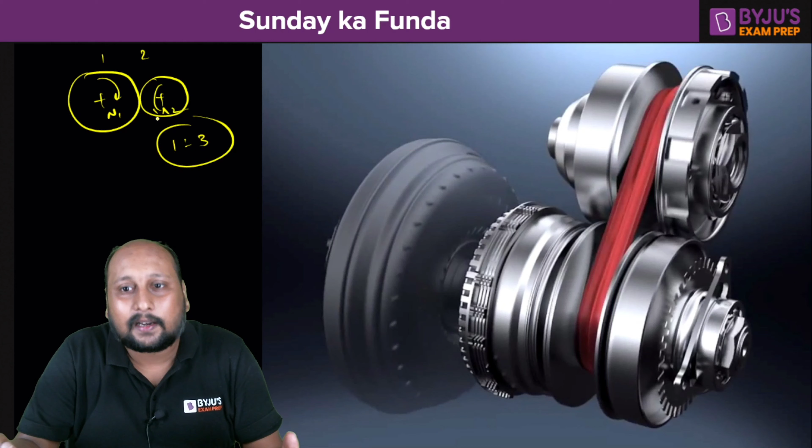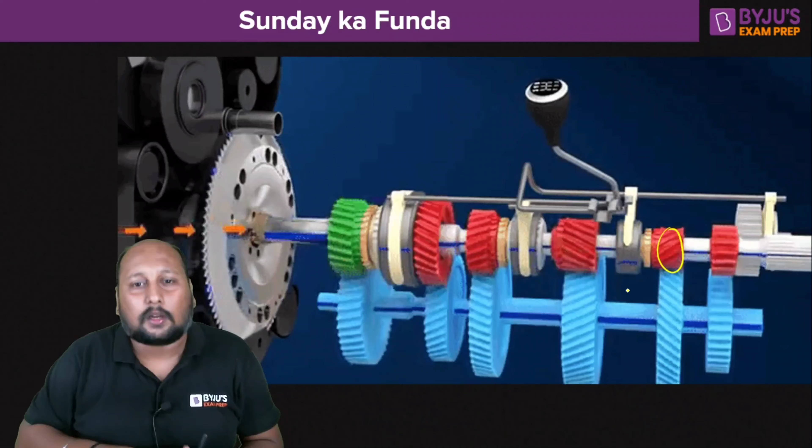So let us see the main components. This is a conventional gearbox in which, if you see clearly, we are able to change the gear and the power basically moves from left to right. According to the combination of different gears, we alter the value of RPM. For example, if a smaller gear is in mesh, that means high RPM, less torque. But if a bigger gear is meshing, it gives less RPM and higher torque.

We actually require that at high gears like 5th or 6th gear, we are cruising at a speed of 70, 90, 100, or even 120 kilometer per hour. But in first and second gear, we only try to limit it to max 10-15 kilometer per hour, that's it, we try to change the gear. If you keep it in the same RPM for too long in first and second gear, then the engine gets burned out, the temperature becomes very high.

Now if I talk about the main components of CVT, there are basically three main components: one is the input shaft, second is the steel belt, and third is the output shaft. In the simplest way, you will understand continuous variable transmission as an input shaft, a steel belt connecting the input and output, and an output shaft running at a low RPM. Now in a conventional gearbox, they were connected with the help of a gear.

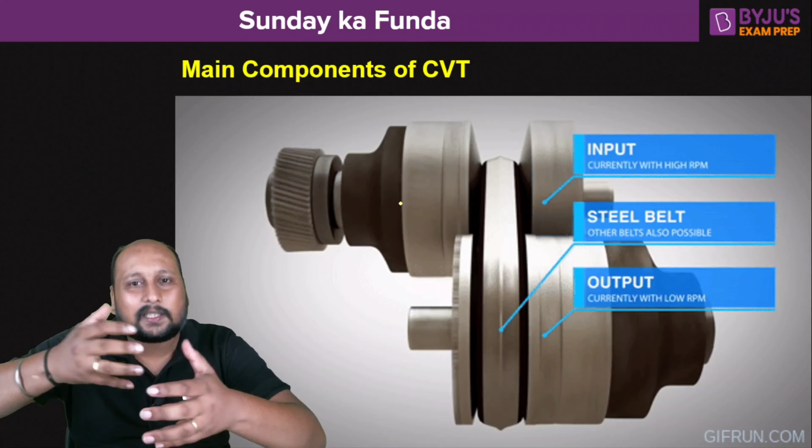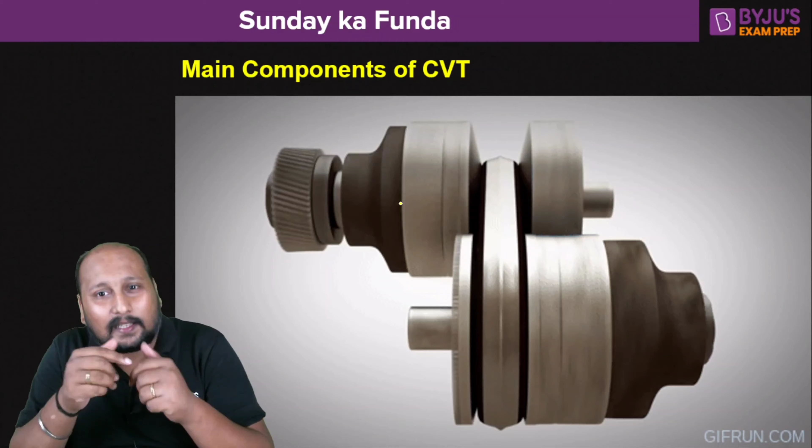If two gears are meshing, we always have a fixed velocity ratio. N1 by N2, the velocity ratio, is always constant. But in this case, we can actually vary it according to our requirement.

Now how is it actually working? There is a very phenomenal principle here. The shaft, or we can say this particular plate, actually comes closer. When it comes closer, the belt is being lifted up.

So when it was driving like this initially, the belt is engaged with a smaller diameter. When it is engaged with a bigger diameter, the RPM is going to change, something like this.

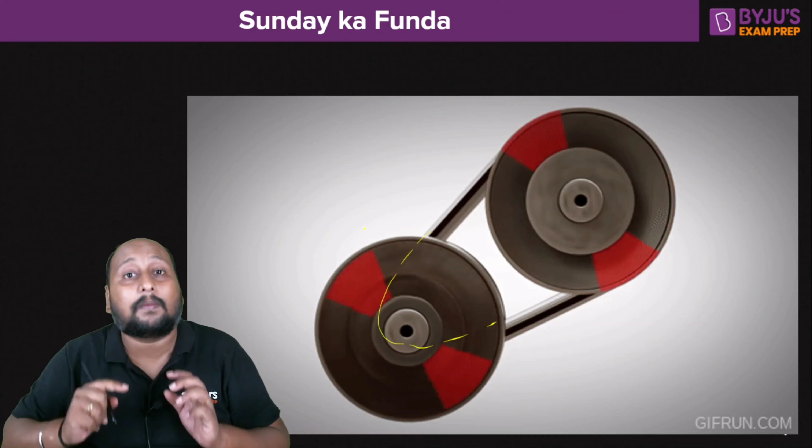If you try to visualize a low gear transmission, this is the engine, your left one, and this is the wheels where we need to transmit. This is the input and this is the output. Here what is happening is a smaller diameter is having a connection with the bigger diameter.

So definitely what happens, we have low power, RPM will be less, torque transmission will be very high. But when you are increasing the diameter, your high gear is being connected and we can easily transmit a high amount of power.

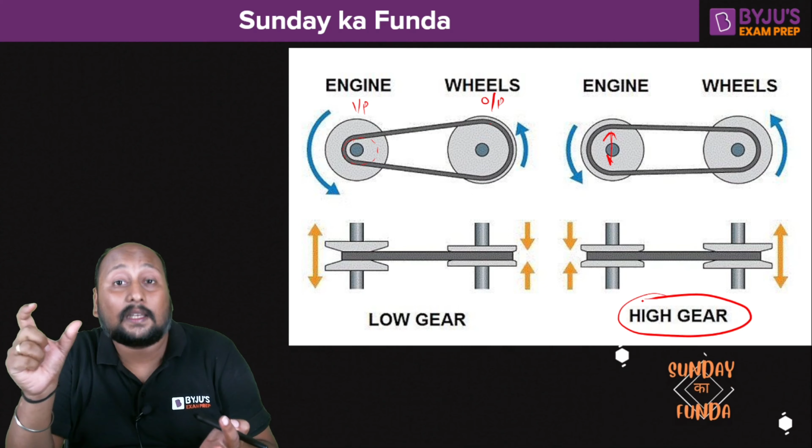Now the problem here is, normally in a CVT engine, at higher RPM when you are cruising at 90 or 100 plus kilometer per hour, there is always a slight amount of sound coming from the engine. But that problem has been rectified by switching from a conventional mechanical belt to an electronic transmission, eCVT. We'll be discussing that also.

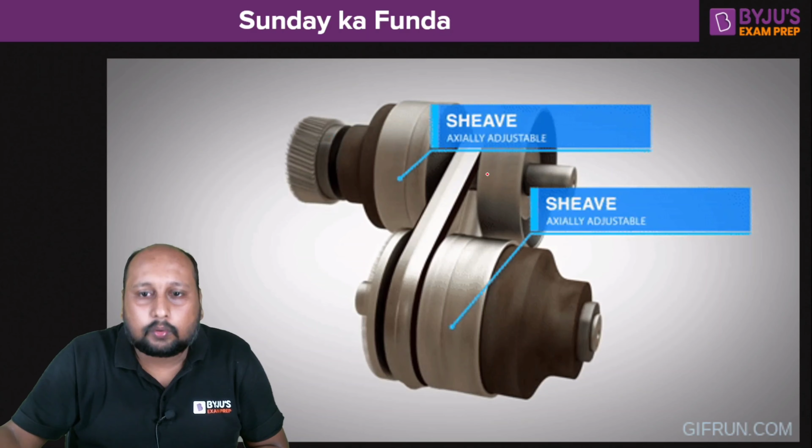So if I talk about how it is working, we are having an adjustable pulley, and it is actually coming closer. When it comes closer, the belt is being lifted up. You can clearly visualize when the two sheaves are coming closer, this belt is moving upward, and when the belt is moving upward, the diameter is changing.

If your diameter changes, somewhere we can say the torque transmission can alter the value according to the requirement. But that was not happening in the conventional gear train.

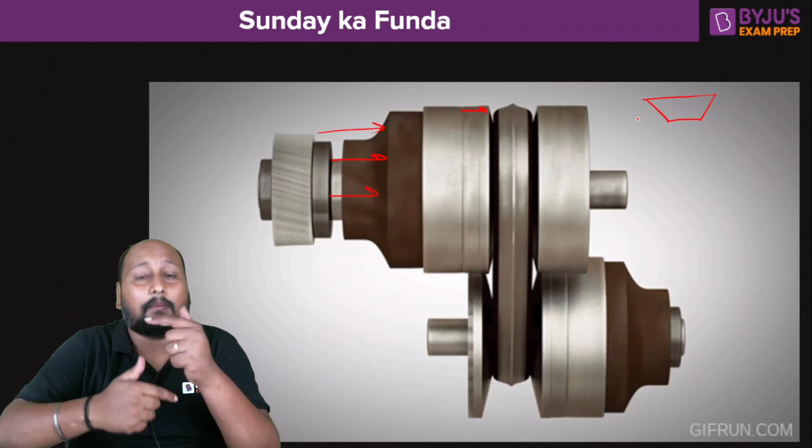Now if I talk about how this is working, when we try to apply a force from the left hand side, this particular sleeve is coming closer, and when it is coming closer, the belt is being lifted up, because we are using a V belt. So when this sleeve is coming closer, the belt is being lifted up, and you can alter the value of velocity ratio according to the requirement.

Now this is that belt. If I say the cross section, I've taken a small cross section. When this sleeve is coming closer, this V cross section is moving upward. This is one of the cross sections of the belt, a steel plate being used in a belt.

Initially we used to use a polymer, which was used for small power transmission. We can use small steel plates connected all together to form a complete steel belt, and we can operate up to near about 600 horsepower of engine by using this particular steel V belt.

So when the sleeve is coming closer, when you are applying force on the left hand side, when they are coming closer, this particular belt is coming in the upward direction, so the effective diameter is increasing. Ultimately the power transmission will be changed, the torque from shaft 1 to shaft 2 will be altered, because we know that tau 1 into omega 1 is equal to tau 2 into omega 2.

So if you are increasing the diameter, you are decreasing the value of omega. If omega is decreasing, you are increasing the value of torque, and that is the basic fundamental of CVT, continuous variable transmission.

Now if you see how this belt is made, we'll be having a stack of many steel elements, and inside this we'll be having a flexible belt made up of a polymer, or even a very flexible element. When it is connected together, we are able to easily have a complete stretch of one belt, which is easily able to push or pull, allowing power transmission from the input shaft to the output shaft.

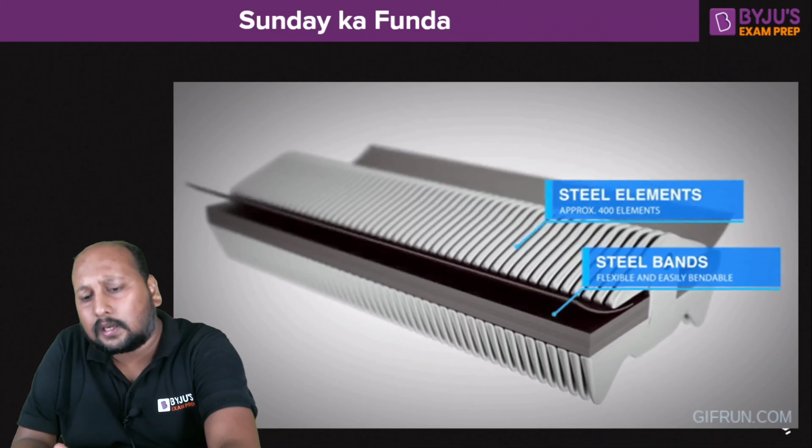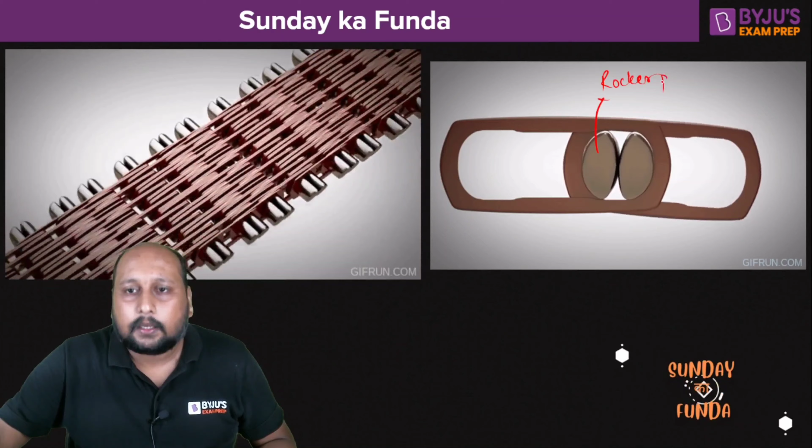It is not like we can only use steel elements; we can also use a connection of this kind of arrangement. That means we'll be having some steel elements connected with some rocker pins. Now when this is connected, the two belts will be easily able to move.

Because when you are having a CVT transmission or continuous variable transmission, you need to have flexibility. If the belt is not flexible, there is a chance of the belt getting broken down, and if the belt is broken down, the complete system fails.

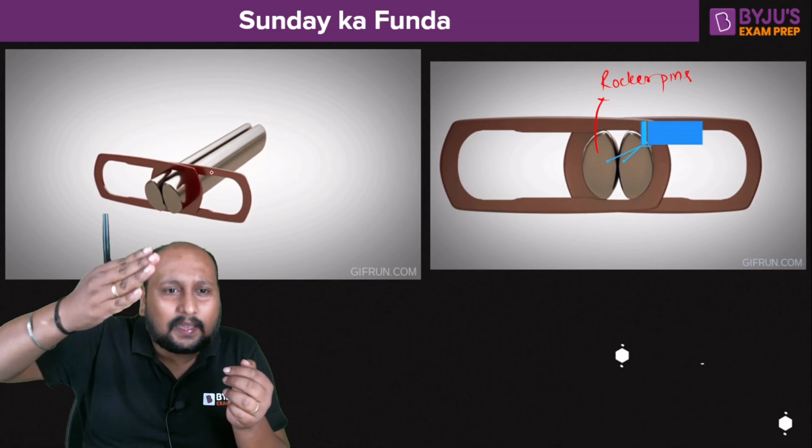So if you try to see, when all the pins are stacked, like in this particular image, ultimately what happens is the rocker pins are moving like this. Easily we will be able to transmit the power from input to output shaft according to our velocity ratio combination.

Now the question is how you can easily move that plate from left to right, like the sleeve moving from left to right. How are we able to move like this? Previously, in the initial stages of CVT, we were using a centrifugal bearing.

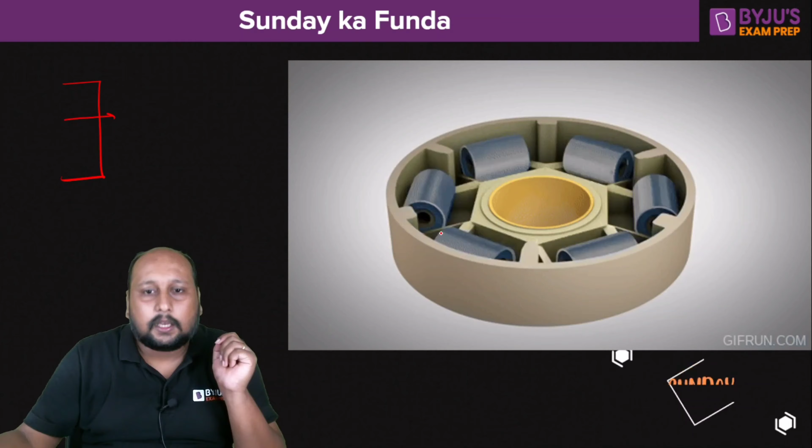What happens is, when the body is rotating, the centrifugal forces will exhibit a pseudo force, and the body will move radially outward. That is the centrifugal force.

So when it is rotating, these cylindrical rollers will be moving outwards. There is a cap which is being used, so when they move outward, this cap will automatically move left and right.

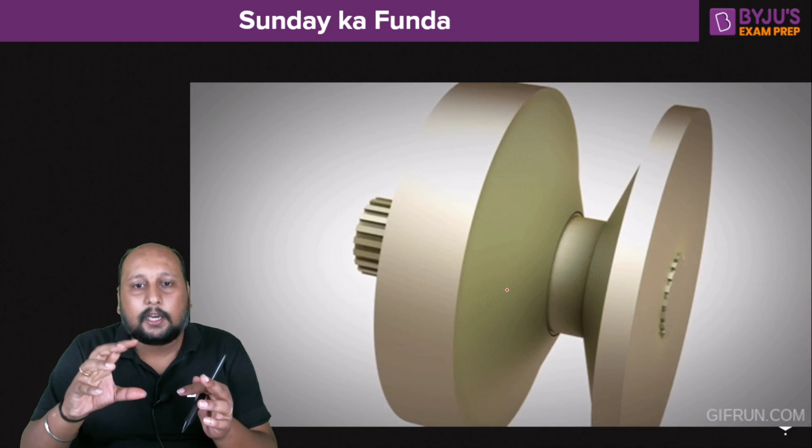If you try to attach this when it is rotating, automatically due to increased RPM, this particular sleeve moves left and right. If you decrease the RPM, the cylinders come closer and the sleeve moves left. When you increase the RPM, the cylinders move away from each other, the sleeve comes outside, they come closer, and ultimately this belt moves upward. But actually nowadays we are not using this kind of arrangement.

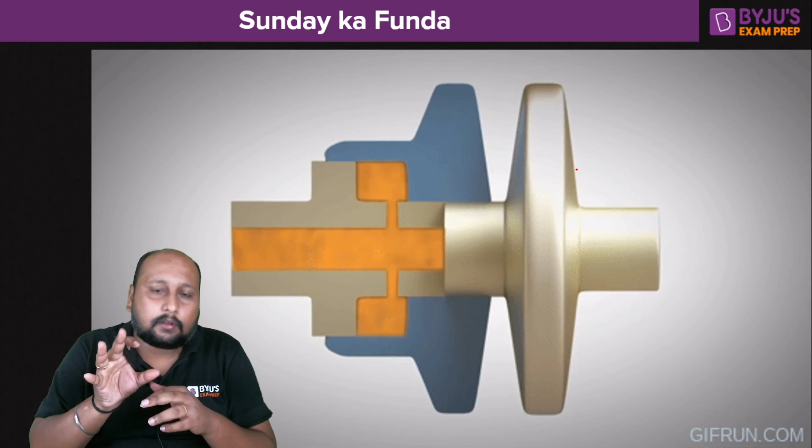We are using a hydraulic oil pressurized segment because it is actually very effective. In the previous case, there's a huge problem - there's a noise issue, and you can only operate till a very limited RPM.

But if you want to work at a higher RPM, or at high speed, or with a high powered engine, now we are shifting towards using pressurized oil, and by using hydraulic pressure, we are able to move this sleeve from left to right very easily.

So this is your CVT transmission, or continuous variable transmission, that we are using in many models, even two-wheelers nowadays. Because when you are in a cruising stage, or driving your vehicle on a highway, we always try to optimize efficiency. We can optimize efficiency if we have some variable parameter, and by using the CVT, we are able to easily change our velocity ratio according to our requirement.

Now let us talk about the different advantages. The best advantage, as we already discussed, is that if you use a conventional gearbox, because of the fixed ratio of velocities, we will have only a limited, fixed engine RPM. If there's a fixed RPM, we won't have any variations - that means it leads to inefficiency, with the engine running at only a specified speed.

But with CVT, the gear ratio can be fine-tuned so that the optimal fuel-air mixture can be selected for the required power. Accordingly, if you select the air-fuel ratio according to the requirement, you can optimize the efficiency in a very great manner. Irrespective of whatever engine or RPM you are working on, if you are able to optimize one parameter according to the dynamic conditions, this definitely leads to the optimization of the vehicle.